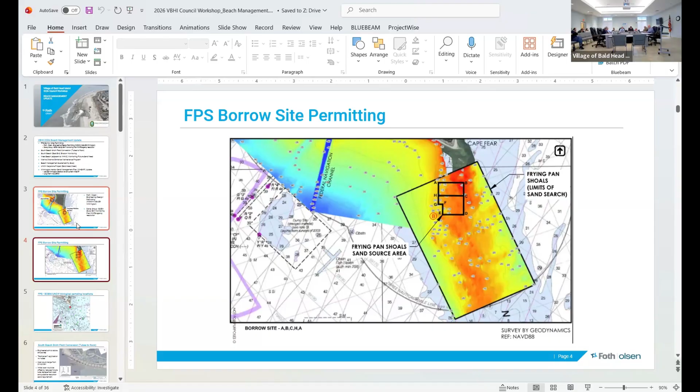Yeah, I just had one thing, for any new council members, the urgency of this is really high. Right now, the sand management plan, we depend on hitting another sand source every 6 years. And right now, the island has no sand source for 2030. Yeah, 2030, 2031 would be the next. Which means that a resolution of this is critical.

So, Chris's group has been working on this for a long time, and I think that we've been setting up plans to be meeting with people in Washington and Raleigh to push this hard over this year. So this is a priority for our initiatives with the village. And Bill, when he gets to the sand management statements later in the presentation, the importance of this will be quickly realized from a financial perspective and need when we look at the options that are available to the village moving forward. Any other comments or questions?

Yeah, I had a couple, if you don't mind. We know Mother Nature doesn't always go on the timeline that we want. If we get to before 2030 and need sand, is Jaybird absolutely prohibited, or is it just frowned upon at this point? You want me to start? Go ahead, Chris. Yeah, please.

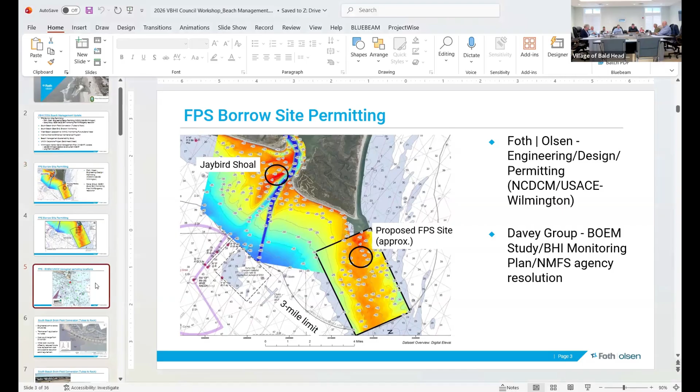Okay. Yes, thank you. Okay, I'm going to move on to the next topic here, the idea of converting the sand tubes to rock. This is both a feasibility exercise as well as a regulatory exercise. So should it be something we want to pursue? I think the first step, we still have not taken action on this from a feasibility standpoint of looking at what the cost would be to convert the groin field. So this could still be a priority in the coming year or two, to look at the cost and the potential cost benefits of doing that.

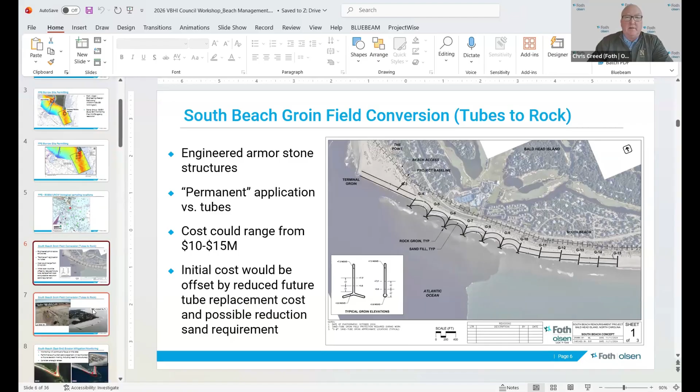The cost benefit would be reducing the need for future replacement of the tubes. But we could compare the cost of tube replacement to the initial capital cost of converting to rock. It would be quite expensive to convert these to rock if we were successful in gaining the regulatory permissions. But this is something that's still on the agenda for us to study for the village. The idea is converting from a tube format of the structures to a hardened format. These are some structures on Longboat Key on the west coast of Florida we completed for that community a couple of years ago.

Chris, that study is not to increase the size or quantity of groins. It's just as is, replace the materials they're made of. And when you're looking at that, you're looking at it from an engineering cost perspective versus impact, nature, turtles, the whole environment? We would have to look at it all because we would like to put some T-heads on the seaward ends of them. You can see those in the photograph here to the right. There can be turtle concerns with those, but from a performance standpoint, we like to add that feature to these structures to make sure the seaward end is stable. And it reduces your long-term maintenance of the structure.

Go ahead. I thought that hardened structures were not permitted in North Carolina.

Well, that would be part of the conversation as part of the regulatory process. And my second observation is I don't think this will meet with a lot of community approval on the island.

Jenny, this is Charles. That's a great point. Generally, there is a hardened structure ban in North Carolina. Our terminal groin and some other communities are an exception. A couple of years ago, we were successful in getting the General Assembly to pass a local act that allows Bald Head to have these. Chris and I were just trying to recall if the T-heads are allowed.

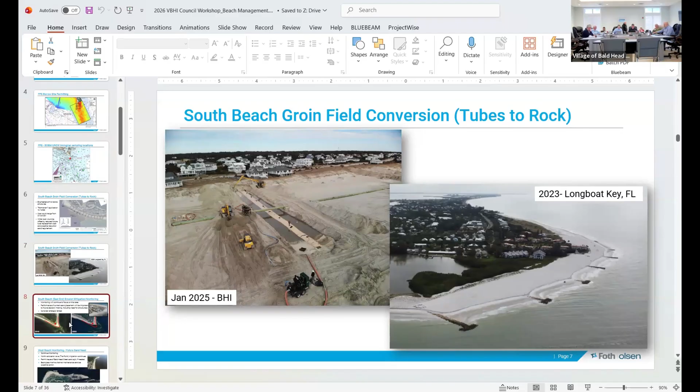Yeah, so the next thing is just continued monitoring. We're pretty fortunate on the east end of the island right now, given the success of the last project, as well as some fortuitous shoal attachment activity just off the Cape there. So conditions are in pretty good shape at this point.

Still, the question is whether this is a sustainable condition in the future, and would ultimately retreat be an issue? Right now, the Shoals Club has installed a pretty robust bag system. Hopefully that won't be tested anytime soon, but that's a line of defense that's been added to that area of the island.

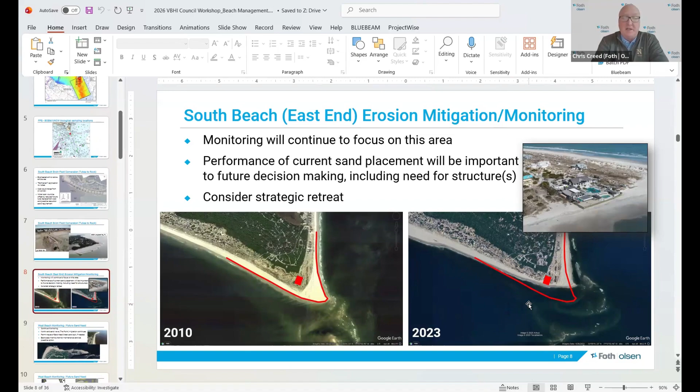So for now, all's good. But things can change very quickly with the dynamics of the shoal itself just offshore—a storm can change it overnight. So we'll continue to monitor that.

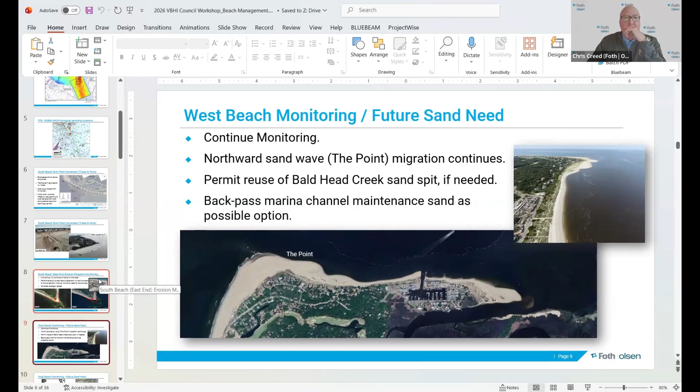The same on West Beach, we're continuing to monitor. There's an area of concern just to the south of the marina. We continue to watch that and look at options as well, and I'll get to that when we get to the capstone comments in a few minutes.

Just some of the history of that region of the shoal itself—it's pretty interesting. The material that's making it from South Beach around to West Beach is attempting to migrate inland toward the marina, but some of it just hasn't made it to the area of most concern yet, so we're continuing to monitor that.

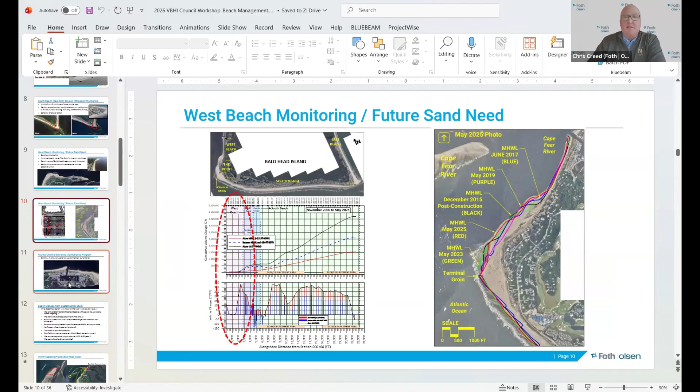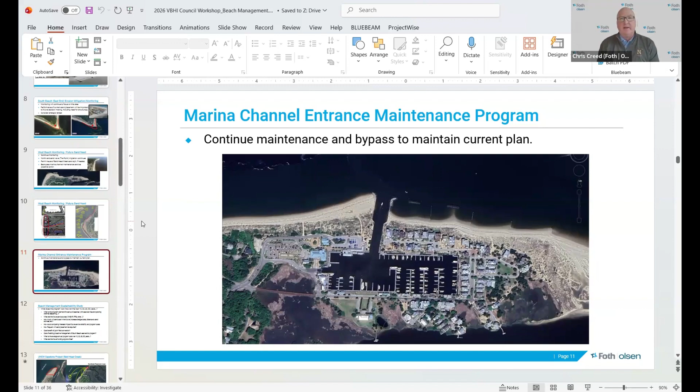Obviously, once it gets to the marina, it could be a problem as we try to maintain navigation conditions across the marina, so that would also be monitored. If we get a big slug of sand continuing to propagate inland on the West Beach shoreline, what is the ultimate fate of that, and how do we manage it once it starts approaching the marina itself?

The beach management sustainability study - we talked about this last year. This is another task we've not been assigned yet, but it's something we still believe the village should consider. Bill Hovensack's comments about the sand management plan speak to a piece of this already, looking at where the program is overall over the next 10, 20, 30, and 50 years, with all the issues you're facing, including sea level rise and the channel deepening activities. We've had good news recently that it's been slowed down, but you're still affected by the channel, and how the sand management plan will affect you, including the availability of sand from places like Frying Pan Shoals and the ever-increasing cost of dredging.

All that being folded in with the groins and all these management activities - how much does it cost to maintain what you have to desired conditions? For the most part, your conditions have been established and improved to a desired level, and moving forward the idea is we need to maintain that. A sustainability study would look at all aspects of your overall program: what is the cost and frequency of each activity involved, and what does that look like from a long-term budgeting standpoint, in terms of how much money it will take the community to continue to maintain and preserve the beaches you've invested so much in over time.

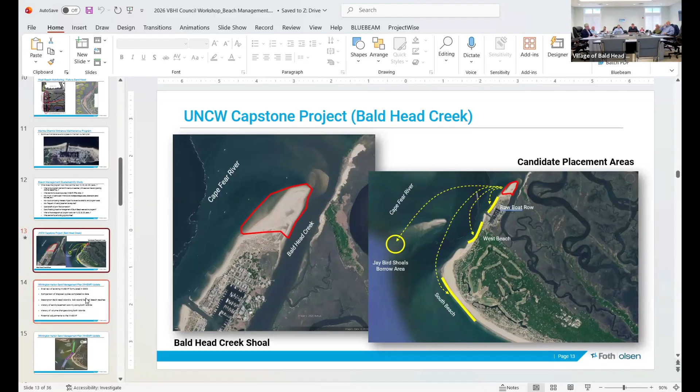Okay. Bill, I'm going to turn it over to you, and I will turn my camera off to not be a distraction, but I'm here to advance your slides. Bill, we actually have till 10. So you have more time. I'm not sharing my screen. Did someone take my screen away from me? Took it away from you, Chris. Okay, good. Less responsibility is better. I'm going to give him a clicker. Oh, perfect. There we go. Thank you so much. Let me share the screen for our audience. Does it have a little laser pointer too? Yeah. Oh, there we go.

Okay. So what I was going to talk about is the Wilmington Harbor Sand Management Plan, which is sort of the governing document for the placement of maintenance disposal material from the channel. It was formulated in 2000, following the channel deepening in 2000, 2001. And the purpose of it was for the placement of beach quality material to go back from whence it came, right, from the various islands.

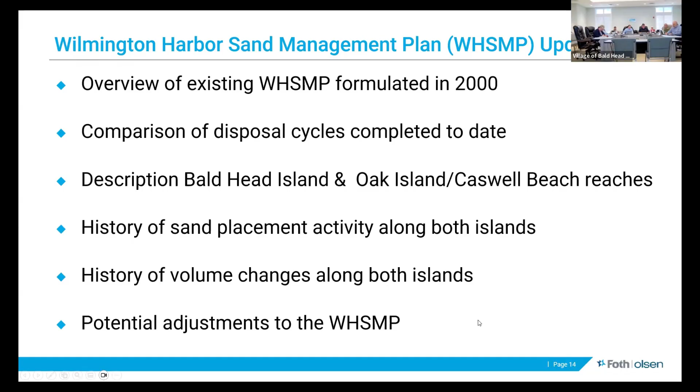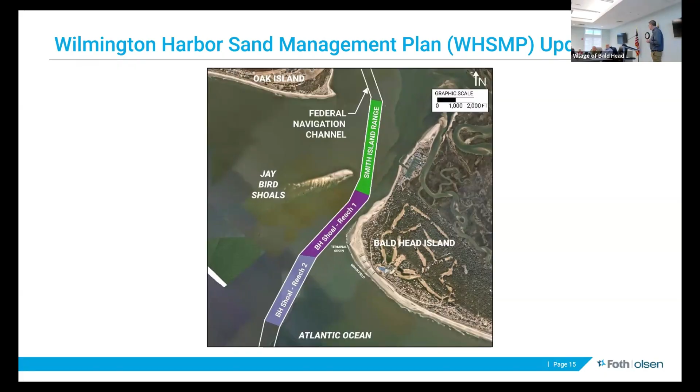So just an overview, here is the channel. It was deepened by about 4 feet in 2000, 2001 and realigned. And that's what prompted the need for the sand management plan. You can see how close it cuts to Bald Head Island, which is one of the causes of the erosion on that end of the island. If you could advance to the next slide, please.

So going to the sand management plan, as I said, it was formulated, written in 2000, and it described the placement of material from the channel maintenance and where it would go along the 2 islands of Oak Island and Bald Head Island. It's very vague in the language, and it can be interpreted. It doesn't call out specific stationing, from this station to this station should receive this. It's very vague.

This is basically the map that it shows, and it describes the placement along Bald Head Island and then Oak Island. And if you can advance to the next slide, the language in it basically said that for every 3 cubic yards of sand, 2 would go to Bald Head Island, 1 would go to Oak Island. Okay. And the way they implemented that was in a 6-year disposal cycle. Every 2 years, you would have a disposal. The first 2 would go to Bald Head Island. The third would go to Oak Island, okay, to get to that 2/3 ratio.

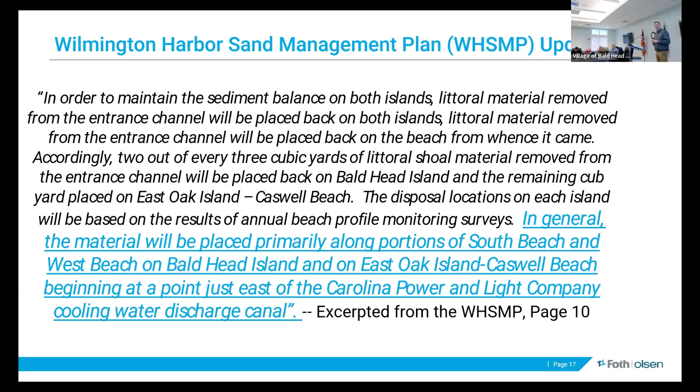And the placement areas, now they did say that the disposal locations should be based on the monitoring results on each island. But in general, the material will be placed primarily along South Beach and West Beach on Bald Head Island. And on East Oak Island, Caswell Beach, beginning at the point just east of the Power and Light Company Cooling Water Discharge Canal. If you go back 1 slide, that's that red star at the top at station 140.

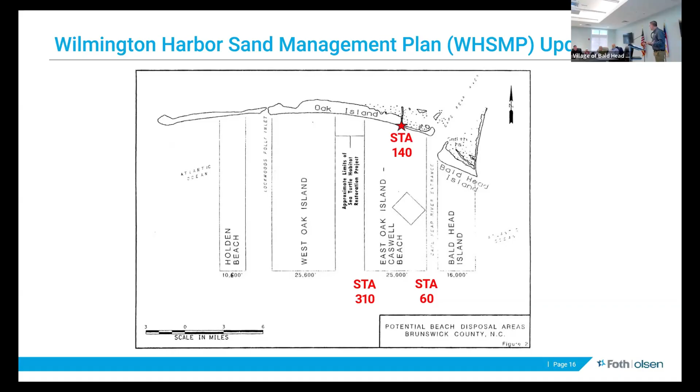Now you can see the area that they described as East Oak Island, Caswell Beach as a placement area. Quite a bit of that is to the west of that star, but it said primarily, in general, a lot of wiggle language in there, which has been sort of a cause of controversy since the beginning. You advance to the next 2 slides.

So how did they come up with this 2-to-1 ratio? It referred back to this 1999 ERDC report, where they had some sediment transport analyses. I looked at the report. I cannot figure out where they get the 2-to-1 ratio. Okay. It is never explicitly concluded in that report. The numbers that are in the report don't really lend themselves to the 2-to-1 ratio.

In fact, when I was reading it, I asked another person in the office his opinion on it. And he's like, oh, well, we wrote a little white paper on this, kind of picking it apart. And what they found in that paper was that the patterns of sediment transport don't match what they're seeing in the monitoring data from the Corps at that time. The input data and analytical methods used were substandard, did not include riverine hydraulics, effect on wave climate. It was just a substandard study that actually didn't lead to the conclusions that were reached in the sand management plan.

Olsen, we did some modeling as part of the terminal groin project, Delft3D modeling, and found a 4.2-to-1 ratio was more appropriate. And we were finding about 323,000 cubic yards of erosion to the nodal point, and I'll talk about that in a second, off of Bald Head Island versus 78,000 cubic yards per year off of Oak Island. Divide that, you get a ratio of 4.2 to 1.

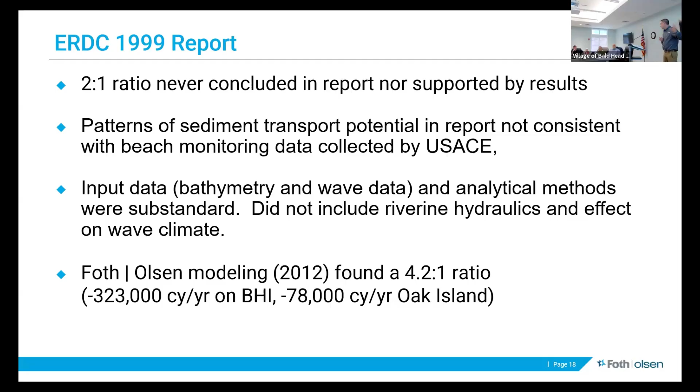With the understanding that that model was more geared towards Bald Head Island, it was a little rougher around Oak Island. So that Oak Island number may be a little less certain than what we were finding on Bald Head Island. Next slide, please.

For your input on Oak Island, were you using the entire span of the island, or were you only using that part that was east of the cooling canal? I'm not sure how they determined that location in that report. Okay. But in the modeling that we did, the nodal point was about that general area. So that volume that was lost was from that nodal point. So just the end of the island, not considering the entire. Not considering the entire island. Okay. And same for Bald Head Island too. It was going to the nodal point, which I'll talk about, which is about 1/3 of the way west from the terminal groin.

I'll show you. I have a graphic depicting that. But I don't want to focus too much on the Bald Head nodal point. Sure, because that's not mentioned in the sand management plan specifically. Agreed. So, talk real quickly about what's been built to date versus what was detailed in the

sand management plan. Theoretically, the sand management plan called for 6-year disposal cycles, every 2 years a disposal project. So far, theoretically, there should have been, as of now, 4 completed cycles with 8 distinct disposal projects along Bald Head Island with a total of 8.7 million cubic yards placed. That's theoretical. In actuality, they've been spaced out a little further, 8 to 9 years on average. 3 completed cycles, so we're missing a cycle, which results in 2 fewer disposals.

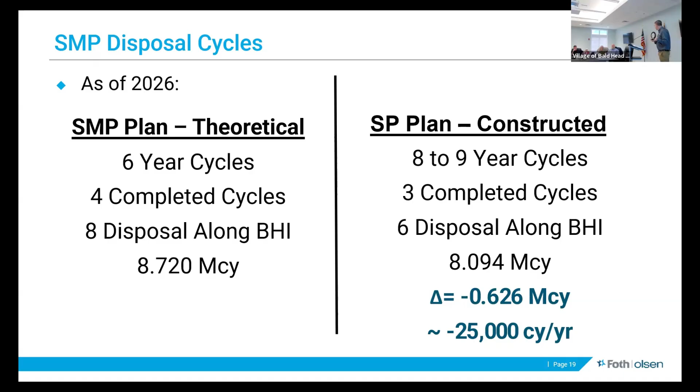Next slide, please. I'm sorry, on the blue dot, that's including the private placement as well, though? No, these are just the disposal projects, and I'll get to the private placement in a minute. Okay. We can talk about that. Well, then that shows 9 disposals. Didn't you say we've only had 6? Maybe I'll have to look at that, but yeah, it should be 6.

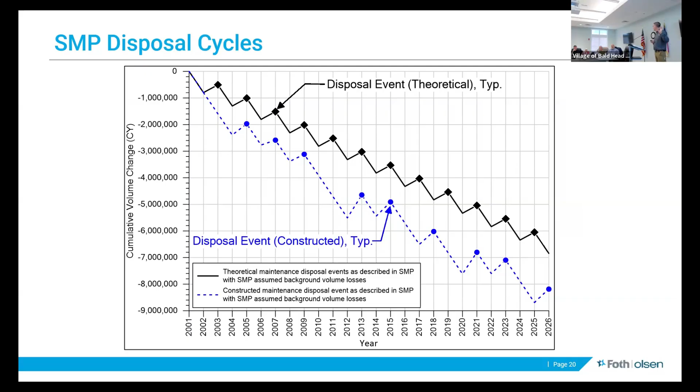This is a photo of Bald Head Island. The nodal point that I was talking about in that Delft 3D modeling is at about station 118, where from that point to the west was 323,000 cubic yards modeled. You'll see a slide later, not to spoil it, but when I crunched the monitoring data, I got about minus 326,000 cubic yards per year. So it was very close to what was modeled. Right.

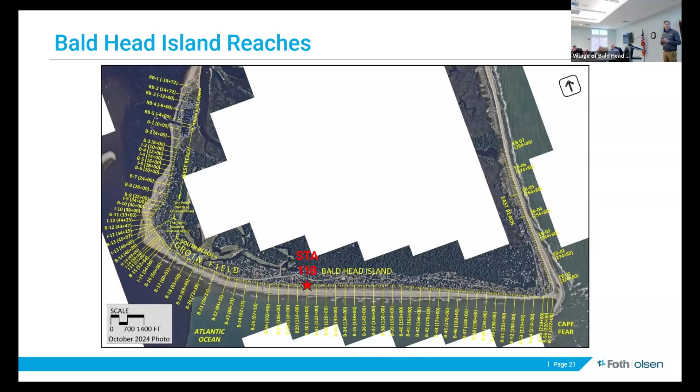West Beach, Bald Head Island. Again, not to talk about it too much, but the monitoring data set that we have for Bald Head is incredible. 2 monitoring surveys a year, comprehensive data, nice spacing. We have a good data set. Next slide, please. This graphic shows all of the beach fill projects built along Bald Head Island since 2001. The blue are disposal projects. The red are village-sponsored projects.

Primarily, the big red ones are the 2010, the 2018-2019, and the recently constructed 2024-25 project. All total, all projects, 14.1 million cubic yards have been placed along Bald Head Island. 12.3 million cubic yards since that initial project, which was about 1.8 million cubic yards. Of that total, 8.1 million cubic yards have been maintenance disposal projects, and 4.2 million from the village at a total cost of about $42.8 million spent by the village, not adjusted for inflation. That's cost at the time.

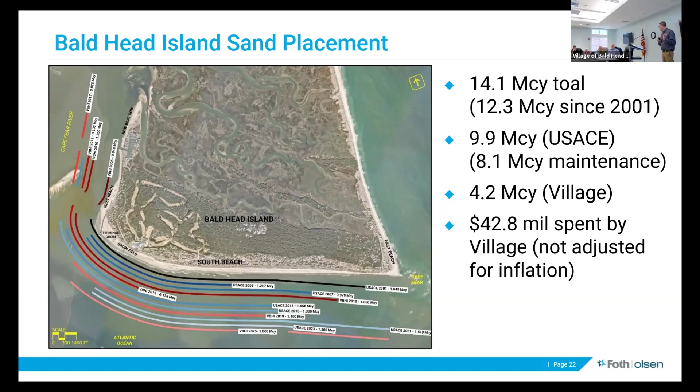Next slide, please. So if you look at the monitoring data and you take out all of those projects, you get a linear fit of about a loss of 402,200 cubic yards per year from the island. That's a big number. And if you look at the linearity of that graph, it's like a clock. It's just very consistent loss.

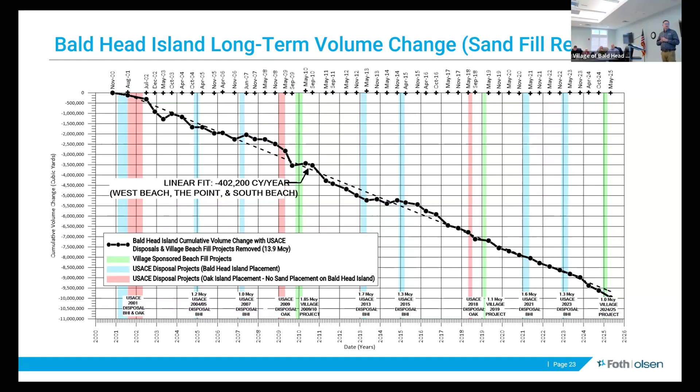If you look, the shaded areas are when we had various projects at the time. So you can see the number of projects, but yeah, 402,000, keep that number in mind, 402,000 cubic yards per year. Next slide, please. Since the terminal groin, it's gone down a little bit, 397,000 cubic yards per year.

But the terminal groin to that nodal point you're talking about, the long-term average, 280,000. Pre-terminal groin, about 326,000 cubic yards, as I mentioned, very close to the Delft modeling. Since then, about 47,000 cubic yards per year. Next slide, please.

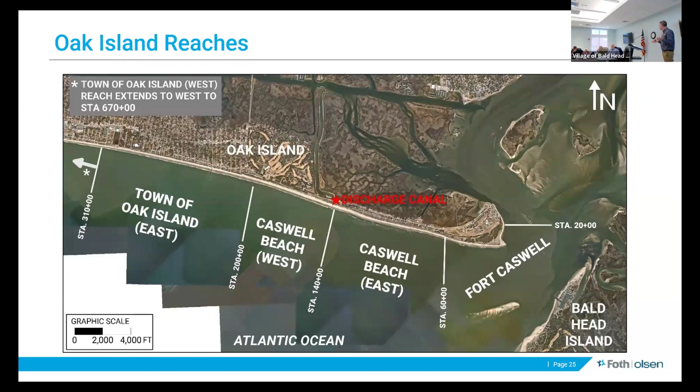Now I'm going to talk a little bit about Oak Island, which is a little bit more of a mystery. These are the reaches of monitoring. You have Fort Caswell, then you have the Caswell Beach east and west, divided along the discharge canal, which is mentioned in the sand management plan. Then you have the town of Oak Island East, which is also included in that graphic in the sand management plan as a potential placement area, and is within the area that the Corps has been placing as part of their disposal projects. Next slide, please.

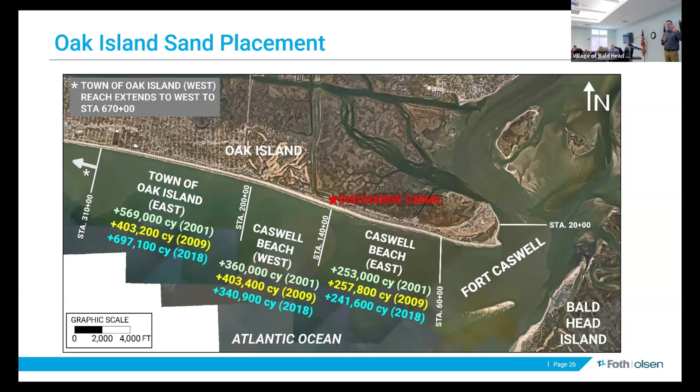This shows what has been placed since 2001, including the initial; the light green is the initial project, and then the yellow is 2009 and 2018. I don't have the exact data yet on the recently completed, but at some point when I get that, I'll update those numbers. You can advance to the next slide.

In summary on that, East Caswell Beach, that's an area west or east of the nodal point, they've placed about 500,000 cubic yards through the two maintenance disposals. These are just the maintenance. For West Caswell Beach, about 0.7 million cubic yards. Oak Island, about 1.2 million cubic yards. All of that, except for about 81,000 cubic yards along East Oak Island Beach, have been part of the disposal project. No sand beyond the maintenance disposal has been placed along Caswell Beach.

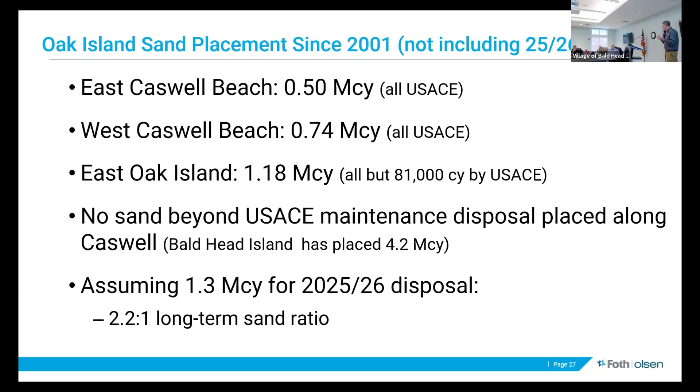And assuming a 1.3 million cubic yard fill for this recently completed disposal, long-term average is about 2.2 to 1 sand sharing ratio. It's a little higher than 2 to 1, but very close. But I want to get back to: no sand beyond the maintenance disposal has been placed along Caswell Beach. So the current plan is more than meeting Caswell Beach's need. Meanwhile, Bald Head Island has placed about 4.2 million cubic yards along your beaches during that time as part of the response. Next slide, please.

So to assess the Oak Island sand losses, I dug into the monitoring reports that are publicly available. I don't have access to the Corps data, profile data, so I had to go based off published reports. Various sources. We have 4 main sources: the Corps. You have our monitoring that we did following the Jay Bird Shoals project, the 2018-19 project, that then was taken over by Moffatt and Nichol when they had their project in 2021 and 2025. And they also had access to the town's data and some Corps data, and they did some other analyses from 2003 to 2019.

And then you have Coastal Protection Engineering, which is the firm that Caswell Beach hires to review the data. The problem with comparison here, each uses slightly different reaches, slightly different methods, slightly different depths of closure, which is the distance offshore where you cut off the survey when you're looking for volume, which comes into play here because you have these shoal features that move and can greatly influence your numbers. And I'll show you that in one sec. Next slide, please.

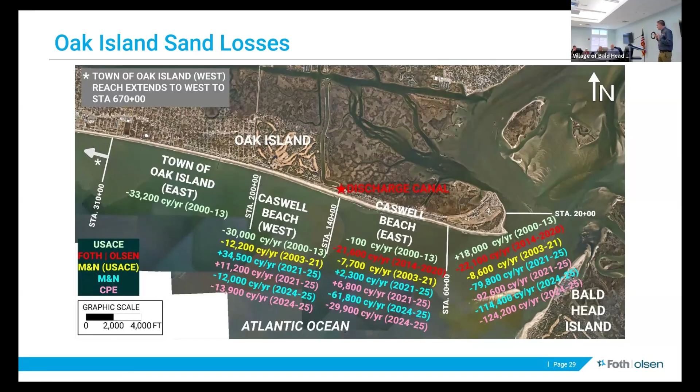Long story short, it's not as easy to boil down to a single number that you can then calculate a sand ratio. Bald Head, we're pretty confident with our number. Oak Island, it's tough to come up with that number to calculate an exact sand ratio. Next slide, please.

Well, what I can tell you is that 2 to 1 is not the correct number. Nowhere, when you slice it any way, do you come close to 2 to 1 on the monitoring data. So if we're going to modify the plan, it needs to be updated from 2 to 1. That is critical. Also, the long gaps between projects need to be significantly reduced. And I'll talk about how we can do that on the slide.

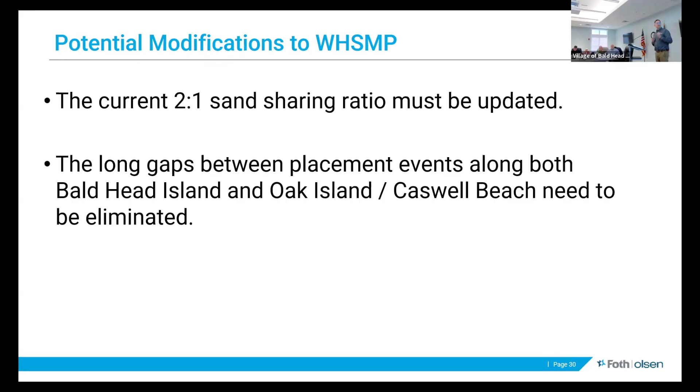Next slide, please. All right, so I looked at a 4 to 1 ratio, which was supported by the modeling that Delft3D did. Very conservative, in my opinion, but something that we can certainly justify. Then I looked at a 6 to 1 ratio, which, if you look at one of the data sets, that Corps 2003 to 2021 data set, if you compare that to our long-term loss rate, you get about a 6 to 1 ratio.

The other nice part about a 6 to 1 ratio is that, assuming the disposal projects moving forward are like what they were for the past 25 years, which is a big assumption, it pretty much alleviates the erosion loss. It would mitigate for the erosion loss during that time.

That makes sense. Then we would eliminate the temporal gaps by placing sand on each island each disposal event. Theoretically, that would be every 2 years in the 6-year disposal plan. In actuality, it's 2.5 to 3 years. So every 2.5 to 3 years, sand would be going to both Bald Head Island and Oak Island. But there is a cost to that because there would be a secondary mobilization of pipeline. But the Corps did a reevaluation report in 2011. I will speed up here. It found that would be less than 2% over the 6-year disposal cycle.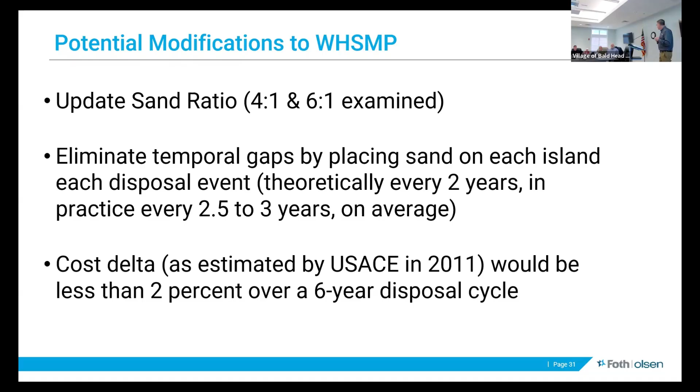Next slide, please. Go ahead and go to the next slide. We'll go to the escalated costs. So every project that Bald Head has been building recently, like the last one, 1 million cubic yards, there's a cost associated, right? I looked at 3 alternatives. Alternative 1 is that nothing changes to the sand ratio. Now, again, these are very preliminary results. I still need to talk with Chris and village staff and go over these numbers, but I just want to present them to give you a comparison. So think of these more as a comparison than an absolute cost.

Looking at a 30-year forecast of costs and escalating those values using the Army Corps index of cost indices, they have a beach restoration number, projecting that forward 30 years. Alternative 1 that we looked at was the same 2 to 1 sand ratio. The village builds a 1 million cubic yard project every 6 years, and in that 6th year you also replace the groin field. Project that over 30 years, that's 5 more nourishment projects. And you can see the total cost there in today's dollars, and then annualized using a discount rate of 6%. If you modify it to 4 to 1, again, it doesn't alleviate your need for village projects.

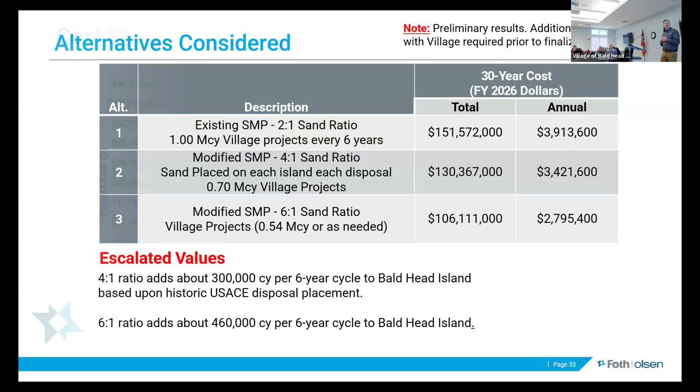And I stopped with 2 minutes left, so I'm going to open it up to questions.

So when you're looking at this, are you using the nodal point or are you going all the way down the beach? So for Bald Head Island, it's all the beach, because there's no nodal point mentioned in the sand management. And if you go nodal point to nodal point, again, it gets tricky because you have to pick time periods and whatnot. So no, this is all the beach.

And for Oak Island, if you use the full data set that includes East Caswell Beach, that includes East Oak Island, I'm sorry. That was East Oak Island and all of Caswell Beach gets you to 6:1. If you go nodal to nodal, that number goes up. Okay, so yeah, the ratio.

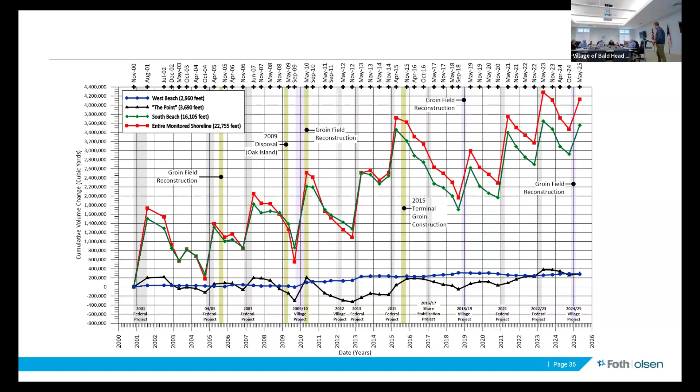Just one thing - I've been looking at this for a long time, and we've had these discussions. When we talk about 6-to-1, it's to make sure you understand it's not like we're going to get sand for the next 6 things, and then Caswell Beach gets sand, and then they have to wait 7 years before they get sand again. I think what prompted a lot of these studies was a conversation with the mayor of Caswell Beach, who can't make it 4 years. When they get sand, they get too much sand, then you wait 4 years, and they're dead. The idea that we're pumping $18 million every 6 years is also ludicrous.

So the 6-to-1 might be a situation where we're both getting sand every time. Right, yeah, it's just that ratio of how much sand we're getting each time. Caswell gets the benefit of having it, they don't have that long delay. And the Corps' reevaluation report acknowledged that this long delay is a problem.

Right, and they talked about that plan Charles was talking about, pulling from particular reaches to go to the shore on an every-2-year cycle. Well, they got half of it right, in my opinion. The every-2-year cycle would be improving because, particularly for Caswell Beach, there's a lot of unraveling going on at the very end before they get that injection of sand, which hopefully with an every-2-year injection wouldn't be a problem.

Yes, Chris - the big picture: if the Corps was doing maintenance dredging every 2 years, and historically there's been 1 million to 1.2 million cubic yards, if we got 750,000 cubic yards and the other side got 250,000 ballparking, that could maintain both sides moving forward. Yeah, and I think it's closer to, I'd have to check my numbers again, but closer to a 900,000 to 175,000 split. Got it.